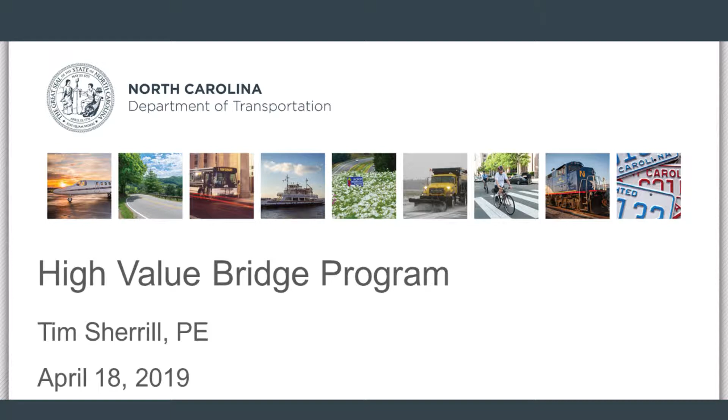I appreciate the opportunity to speak today. I really enjoy coming to these conferences every year. It's very beneficial, I find it to be. I try to preach that to anybody that I see, but it seems like every time I come, every year I come, I either make more connections, of course, which is a great thing, or I learn something new that I can take back and use in North Carolina. So I'm glad you all are here, and if you're not here, get here next year.

I'm going to talk a little bit today about our high-value bridge preservation program. And I have to give credit where credit is due. I'm kind of the caretaker of this thing at this point. This was really started by Greg Perfetti and Rick Nelson. Greg was our former unit head for the structures department. I guess probably about 5 years ago or so, he did what we call going downtown. So he went and worked in the secretary's office. He was head of operations.

I think in the past, and probably not in the too distant past, we would approach the legislature to ask for funding for bridge preservation or other bridge work, but particularly in preservation, we would ask for money, and I think they would ask the question, well, what are you going to spend it on? Bridges, and we didn't really have a really good answer for exactly what we're going to do. And so I think from Greg's perspective, it was a good idea to really have a program and have bridges identified, that if you give us this money, this is where we're going to work, and this is what we're going to do.

And so he worked with Rick Nelson. Many of you know Rick. Rick was here earlier this week. I think he left yesterday, but I guess he went to the private sector a couple of years ago. But Rick worked with Greg, and they came up with this high-value bridge program.

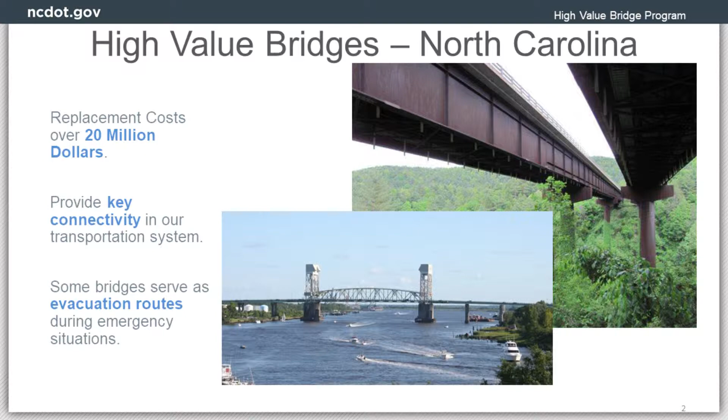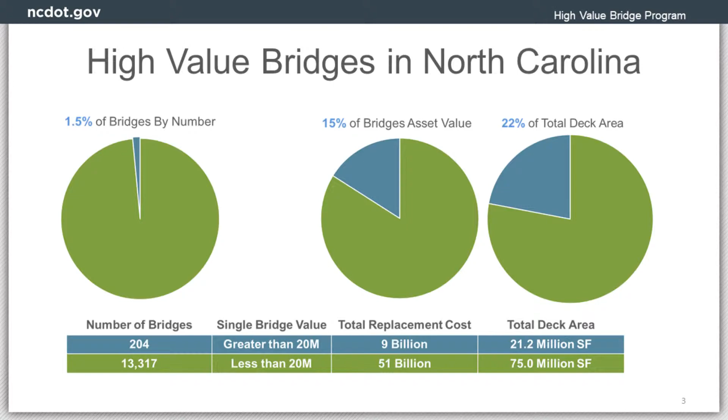So if you look at these high-value bridges over the whole number of our inventory, it's only about 1.5% of the total inventory. It's 15% of the asset value and 22% of the deck area, if you want to look and see how big the bridges are. So this is a big impact. Really, it takes up a big footprint in our inventory. And if you look at just the NHS routes, it's a bigger impact as well. So these are, again, important bridges to keep going, keep in service.

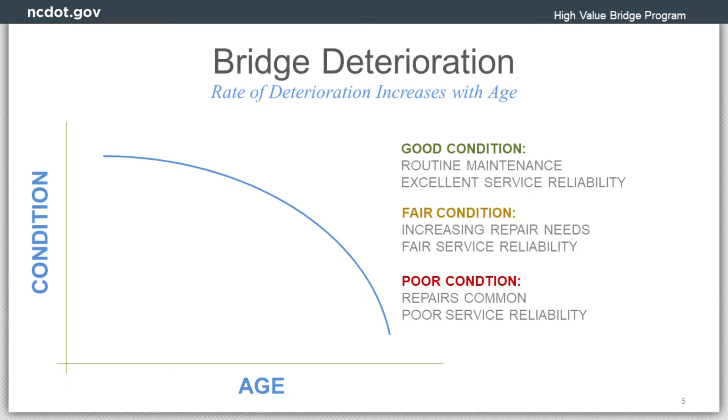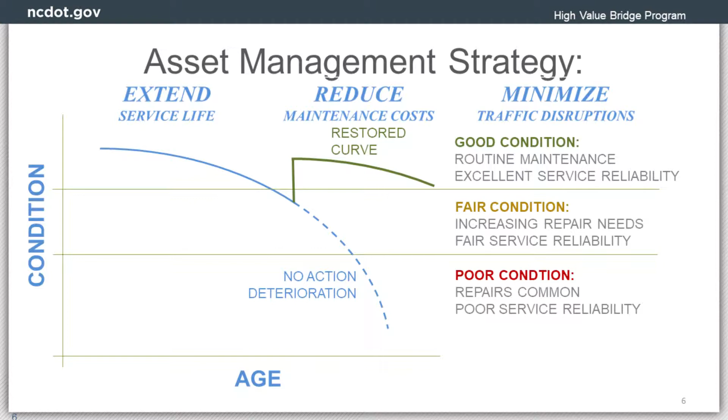These next two slides, again, are preaching to the choir. You guys have seen this, but some of these are the actual slides that we used in presentations to the legislature. So the whole story with the curve there is that over time, the condition of your bridges will deteriorate: good, fair, poor condition. With preservation, what we want to do is try to stop that curve and reestablish it in that good condition area. We want to extend the service life, reduce maintenance costs, and help to minimize traffic disruptions.

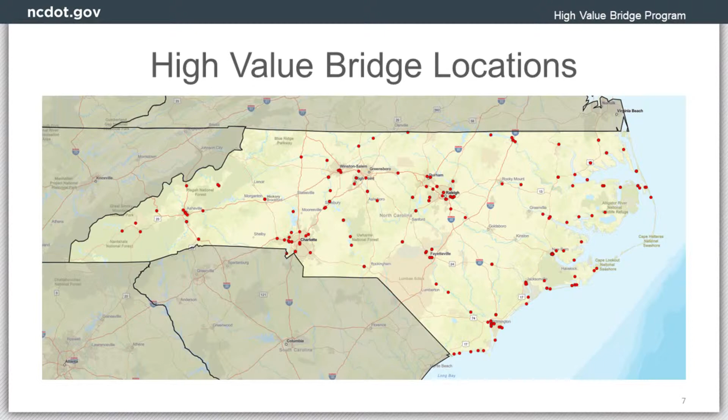In an effort to try to provide a little equity across the state, there are some areas where there aren't any high-value bridges. Up here in this part of the state, that stretch right there in the northwest corner, a couple of different areas. We approached those folks in those divisions. We didn't want them complaining, like, you could do all this work everywhere else, but we're not getting any.

So we approached them and we said, well, what are some bridges that, maybe it's not $20 million, but tell me some bridges that you have that are important. If that bridge goes down or if you have to replace it, it's going to be a big interruption to you. Didn't go with a hard, fast rule with $20 million. That was just sort of a guideline.

But the other thing to say about this map is, like you said, there's a lot of the bridges down at the coast. On the water, as you can imagine, we're crossing larger, wider rivers, marshy areas, whatever. So they're very large. They're down near the water. We don't want them to become endangered, and so the rallying cry became, "Save the whales."

What bridge are you working on? I'm working on Alligator River Bridge. Is that one of the whales? Yeah, that's a whale. Save the whales, man.

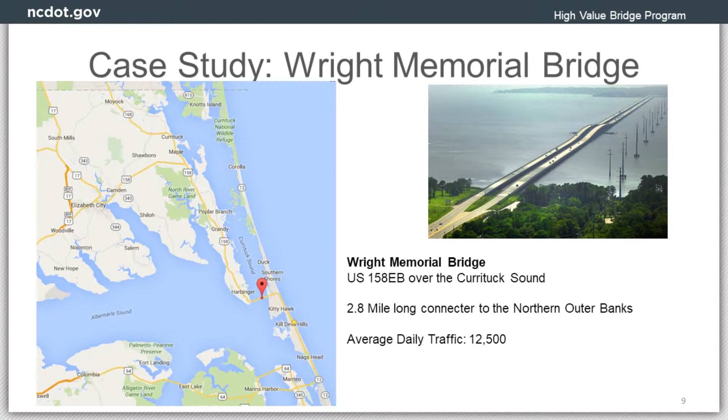So next couple slides here, I'm just going to do a couple of examples of projects that we've worked on as part of the High Value Bridge program. The Wright Memorial Bridge, the one that we worked on in this particular project is US 158 eastbound over the Currituck Sound, almost 3 mile long stretch. The bridge in question here is the one on the right. There's another bridge on the left that's westbound. We did an overlay on that project probably about 5 or 6 years ago, so we weren't including that in our overall program at this point.

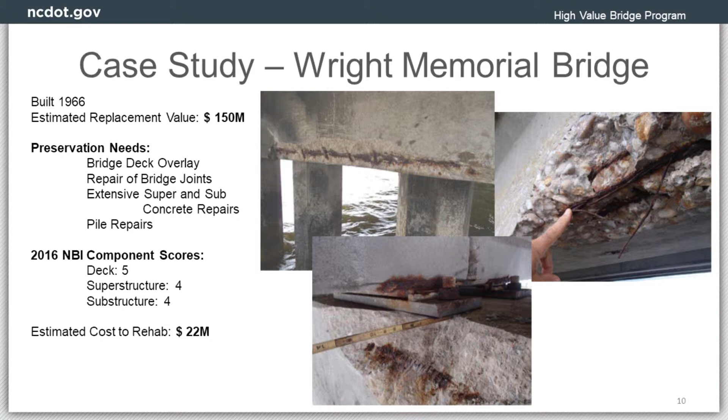So the eastbound 158. Built in 1966, estimated replacement value of $150 million. Needs, sort of the standard thing, deck, super, sub, right? Overlay and joints, extensive super and sub concrete repairs, and pile repairs. The 2016 scores were 5, 4, 4. So in addition to it being a high-value bridge, it's structurally deficient. There's a big emphasis, of course, on trying to address structurally deficient, so we kind of killed 2 birds with 1 stone right here. Estimated rehab cost of about $22 million.

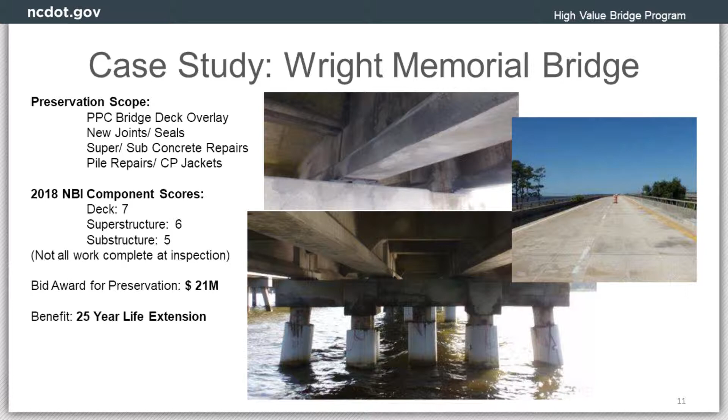Our new scores in 2018 were 7, 6, and 5. I think that 5 is probably going to improve at the next inspection. The inspection was going on when they were still actually doing some of the substructure work. It wasn't completed at that time. So I'm imagining that 5 may go to a 6. The rehab cost ended up being about $21 million, and we're looking at at least another 25-year life extension for the bridge. It's likely to be more than that, but we're anticipating 25.

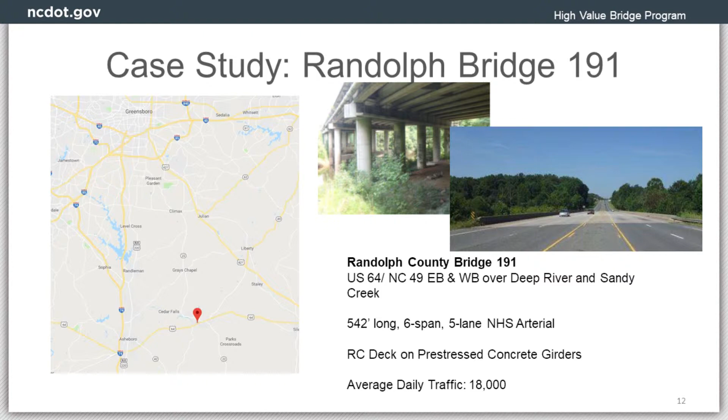Another case study here, Randolph County 191. This is a typical workhorse bridge. There's nothing really hot and sexy about this thing. It's 6 spans, it's 5 lanes wide, pre-stressed girders, just sort of a standard workhorse bridge. This is sort of the middle of the state, about 30 miles south of Greensboro. It was built in 1988, replacement value of $28 million.

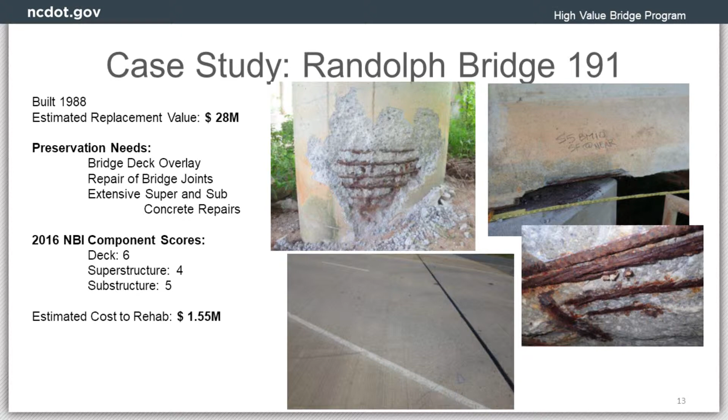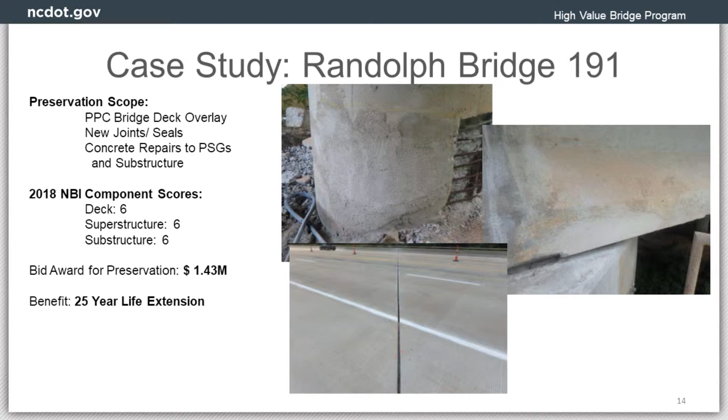Estimated rehab was about $1.5 million. You can see some of the repair work that's been completed: new PPC overlay with seals, concrete repairs to the pre-stressed girders and to the sub. And the 2018 inspection scores were 666, $1.4 million, 25-year life extension for the bridge.

This is an upcoming project, the Green River Bridges. This is just south of Asheville. I-26 is a very important route for traffic, truck traffic and cargo. A lot of traffic comes up from out of South Carolina or goes into South Carolina. 26 starts or ends in Charleston, so there's a lot of traffic that comes out of the port there. It comes up 26 through Asheville, and they take 40 west to Knoxville, or 26 farther north up to Kingsport and Bristol in the area. So it's a very important route to keep open.

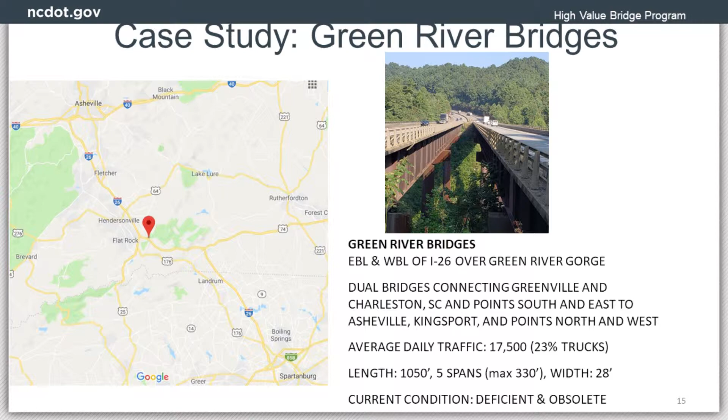These two bridges, dual bridges, a little over 1,000 feet long, 5 spans, built in 1968. At the time they were built, they were the highest bridges in our state, but they're now the second highest bridges. About 200 feet from the deck to the Green River below. Estimated replacement value of $54 million. The bridges are functionally obsolete. They're very narrow. They're fracture critical. You have the 2-girder system there.

Initially, we were approaching this project to try to go in and widen the decks, replace the decks or widen them and replace the rail. You can see the rail was a 3-bar metal rail system. We did a retrofit in the 80s to improve that safety there, but there was a lot of work that needs to be done to these bridges. The division was very nervous about doing a lot of work to close lanes or to narrow lanes to single lanes, as you can imagine with all the traffic that comes through there.

John Sloan, I don't know if John is still here. He's with AECOM. AECOM is our consultant on this project, and they've done an outstanding job on this thing. They've really done a lot of work in a short amount of time. When John initially proposed doing what I'm about to tell you, I thought he was crazy, but it actually has turned out to be a great idea.

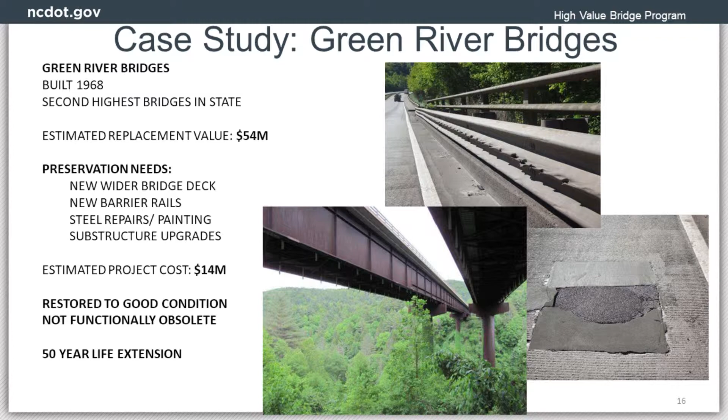So the idea was to build to the middle. We would connect the 2 bridges together, have a single deck across everything, and that helps a little bit with the traffic situation as well. So the idea is that we would initially build that portion of the deck into the middle there, shift traffic to the middle. You'd have a 1-lane westbound situation for a few months while we remove the deck on the westbound side of the bridge. And then at that point, we can go back to 2-lane, 2-way.

It's a very exciting project for me. I think it's going to be a lot of fun. Well, it's going to be fun to watch. It's not going to be fun to be out there doing the actual work, probably. You're 200 feet off the water, right?

It's a very exciting project and a great extension on the life of this bridge. And like I said, it's fracture critical because of the current situation. By connecting the 2 of them, we provide more redundancy. We'll have a 4-girder system for a single bridge. So from that sense, it kind of reduces the fracture critical. From the classification of the AASHTO requirements, we're still fracture critical because of the spacing of the floor beams. But I think it will end up being a much better performing bridge than the 2 bridges that we have now.

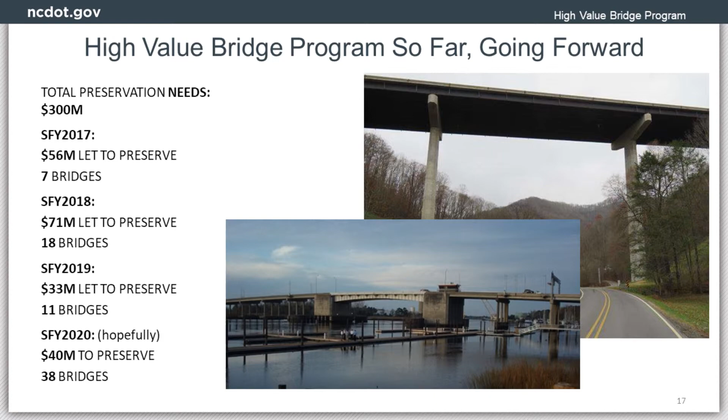What have we done so far, and what are we doing going forward? On these 200 bridges that we've identified, roughly we'd need about $300 million to do everything, and we're hoping to continue to move forward. So far, in 2017, we let 7 bridges for $56 million. 2018, 18 bridges for 71; 2019, 11 bridges for 33. This next year, our budget hasn't been established. The legislature is still working on that, but we're anticipating, hoping for $40 million for 38 bridges.

One thing I did mention before, we didn't really have a program identified, and even though Greg has left and Rick has left, there's enough folks still in the legislature and enough of the folks that are downtown that could make that presentation years ago to get the high value program going.

I think the legislature better understands the idea of doing bridge preservation, so it's a little bit of an easier sell to continue the program and get more funding. End of my presentation. Any questions?

You talk about the rehabilitation that you're doing, extending probably at least 25 years or longer, but is your ultimate goal to get 75 to 100 years out of that bridge structure in the course of its lifetime? Well, I would hope so.

I think when we say things like 25-year extension, the expectation is that based on the work that we're doing right now, we wouldn't have to do any more significant rehabilitation work or maintenance work for another 25 years or so. Like an overlay. An overlay's typical lifespan is 25 years, and so it doesn't necessarily mean that the bridge is going to fall down in 25 years, but we would expect that we wouldn't have to do anything significant for another 25 years.